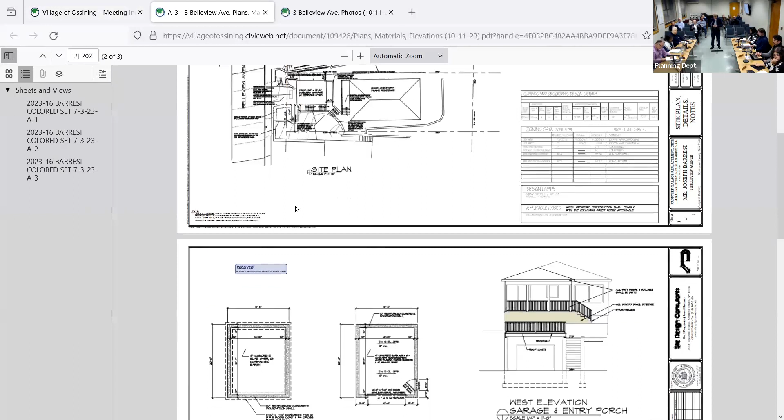We were brought on board at the beginning of this year to try and resolve all of the issues, to clear up the violations, to knock down that garage because it is in pretty bad shape. I'm sure Mr. Gastinelli has been by that site a few times, you can see it. So we want to knock down the existing garage and put a new garage in its place, just a little bit larger footprint. Again, we want to clean up the site.

We want to put new concrete stairs to access the front of the existing home. And then there are other violations that need to be cleared up, which will be included in the final plans. The existing front porch has some structural work that was completed without a permit. There are stairs with no rails, so we'll address those separately. But it'll all be part of the same submission to the building department, hopefully after we're granted the variances that were requested.

Do you want me to list the variances, or just read off of your paperwork back to us? How does that work?

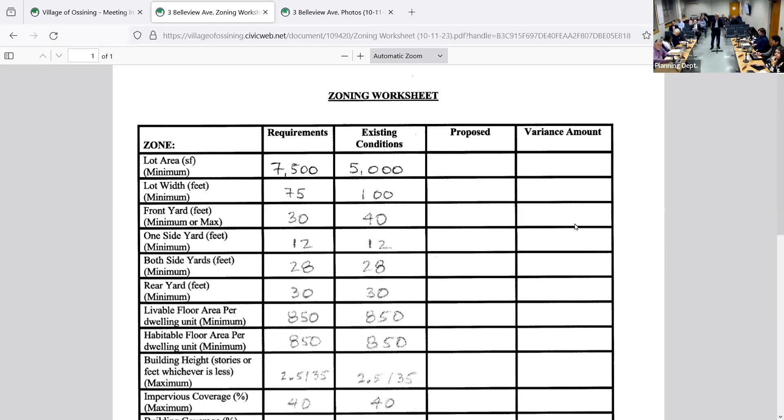Why don't you go through the sheet if you could? So what happened was Mr. Gastinelli provided that sheet. We received an email back on November 8th that we were not going to be able to appear before this board, and that we had to clear up and provide a new zoning data chart, which we did. So we provided a new existing site plan, proposed site plan, and then a new zoning data chart. So that's not it.

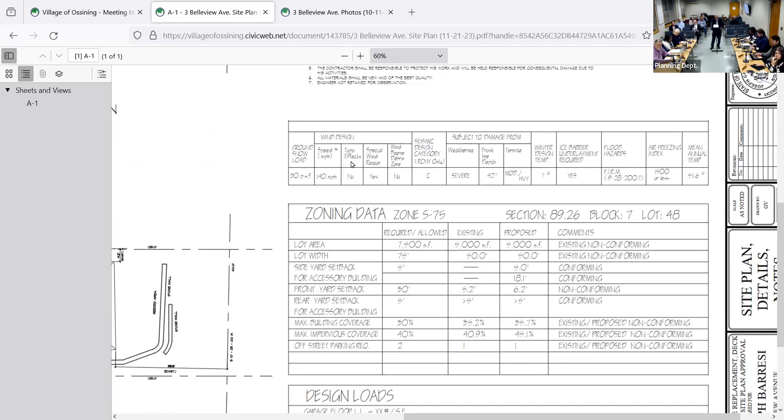Okay, is this it? That is it, correct. And if I could pull my sheet out. Hold on. Hey, give me a minute. Okay.

Thank you. So again, if you take a look at the zoning data sheet, it is an existing non-conforming lot. Code requires 7,500 square feet. Mr. Barresi's lot is 5,000 square feet. I also want to note that if you look at your zoning map, his parcel is the last one in that zone, just one up from the corner, and his is the smallest parcel in that particular zone. So we're also working with a non-conforming lot. The lot width is only 50 feet, where 75 is required by code.

And then I'm a little confused, I thought I read in your code that the setback for an accessory structure is 5 feet off of any property line. Yet it's not supposed to be in the front yard, the side yard is okay, so it's the front yard. So the existing garage is actually 5.2 feet off the front property line. We're proposing to move it back a foot because it helps us with our retaining walls and the grading of the property, so we're proposing to put it at 6.2. Again, because we're an undersized lot, we really don't have much leeway on working with that setback.

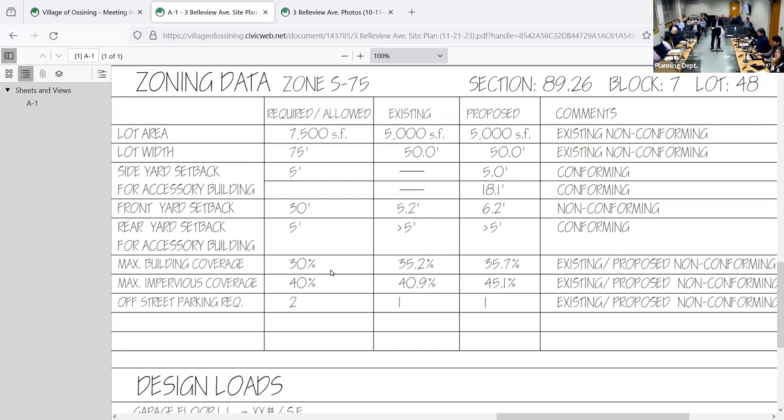Again, the building coverage: the code allows 30% coverage. The existing is at 35.2, and we're requesting to increase that to 35.7. Again, it's basically by changing the footprint of the garage. The existing garage is 319 square feet; we're proposing 330. I looked at the survey, and if you look at the garage on the original survey, it's kind of a trapezoid rather than a rectangle. So we'd like to square that off, put a garage in that's 20 feet deep by 16.5 feet wide.

So that's a question - you said 35.2 is what it is, and it's going to 35.7, okay? So I'm just wondering, am I looking at the wrong zoning data sheet? This says 43.3. Right, so this is the corrected one. That was the email we received on November 8th, because what happened was, I guess Mr...

Barresi had previously filled out the application, perhaps last year or the year before, and submitted that entire packet. We didn't get a chance to review it at the time. So when we reviewed it, we went back and did the calculations. These are the corrected calculations.

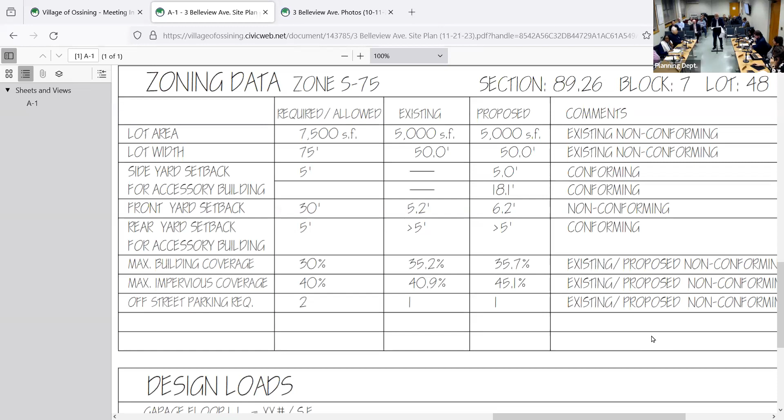So, the picture we just saw before of the garage - is this new garage going to be exactly in the same footprint, and the same driveway? It's going to be about 11 feet larger square footage wise, and we were hoping to widen the driveway a little bit, again because we have an issue with parking.

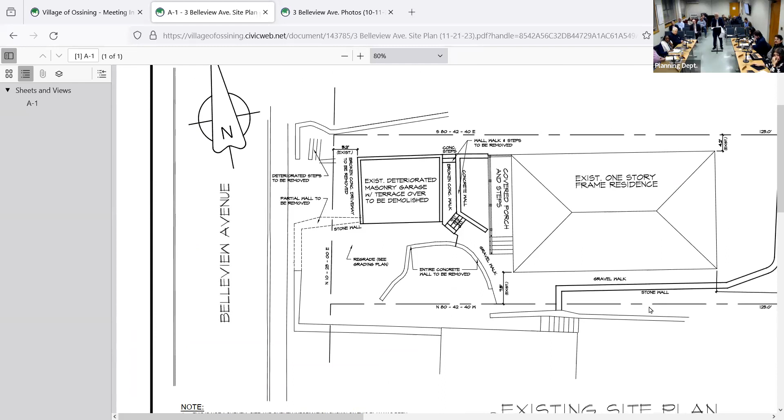We're required by code to have 2 off-street spaces. If you take a look at the property line, there's only 6.2 feet from the property line to the front of the garage, and we can't push it any further back to the house. So it'll be a 2-car garage - not really, it'll be 1 car and a half.

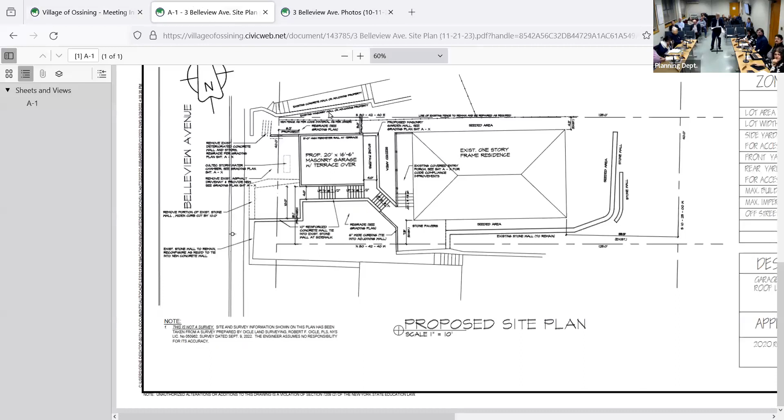I think there's a plan that shows the existing layout and where they're proposing. That's the November 21st proposal - I was looking at the wrong one. If you look above it on that same sheet, that's the existing.

So you're asking for a variance on parking then? Yeah, I guess we need it - but it's an existing 1 car now, so we'd like to continue that, is what we're requesting. You're not asking for less parking than you already have? No, we're not asking for less, we're asking to maintain the same and just make the garage a bit wider, that's all, to allow for storage.

Again, if you walk the site, you'll see that there's a difference in elevation, probably close to 15 feet between the elevation at the street and the elevation at the front of the house. If you take a look at...

Another question - the max impervious surface coverage, is that not increasing that much? It's only going to 45.1 over our 40% requirement.

But are you open to using a pervious surface for the widened driveway? Sure, it's one way to get it back down, absolutely. I wonder what percentage that changes it, because that might help. So if we use, for example, Unilock on stone dust, is that considered pervious? Yeah, that would be considered pervious. Okay, so that's something that would reduce the amount of variance needed - we'll just make a note of it.

So let me just clarify - you're asking for a variance on the 5,000 square foot lot. It's for the entire existing lot, which is non-conforming. So I'm guessing, do we need a variance for that?

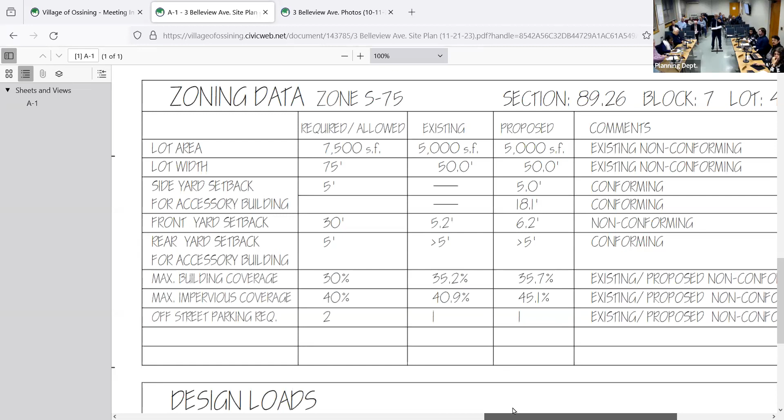We tried to push it back a little bit further, but we're afraid once we start digging there - we have a retaining wall, it's a pretty massive wall to hold back the building, which is again 15 or 20 feet higher than street elevation. So I think we have the back of the garage as far back as we can go. Unfortunately for Ossining, there's a lot of lots that are very skinny, so you're forced into non-conforming situations, and the garage is pre-existing.

And the reason you have to come before us for that is because once you demolish an accessory structure, it's considered a different use, so you have to find relief. I understand, and it all makes sense.

It looks like, while you're still asking for a variance for front yard setback, you're moving closer to code - we moved it back as much as we were able to. That seems positive, and it obviously looks like it's going to address a safety issue, and the stairs are obviously a safety issue as well. And then if you did walk...

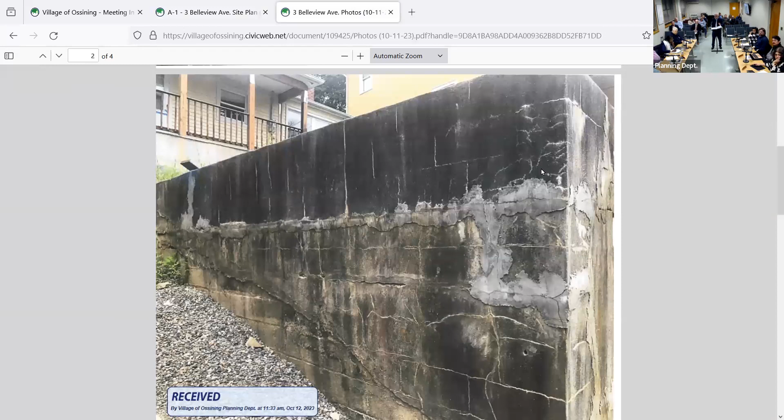If you walk the site, you'll see there's a lot of rubble, but that's all going to be cleaned up. We're proposing seeding on the right side and the rear of the property, with just a little bit of paved area on the right side, using Unilock there as well.

Is the nature of the structure a single family or a two family? It's a single family, yes, and it's going to stay a single family, absolutely.

Question: how much more space would you need for it to be a two-car garage? Would that fit there? Too much, yeah. I'm just wondering, because I know you're making it bigger, but you're not making it big enough. You also have to consider if you do a two-car garage, you'd have to do a curb cut, and it's a parking lot issue.

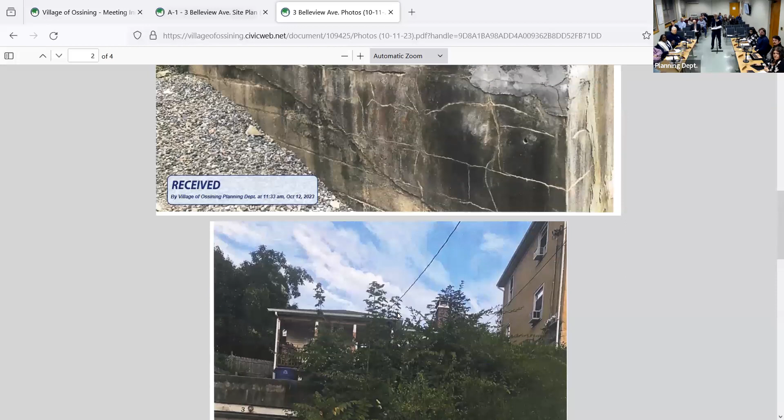If you walk the site, you'll see there's an awful lot of earth that has to be removed, and we have to do grading. We're trying to minimize the amount of retaining walls we have. The southern wall of the stairs will now become the retaining wall, and once we regrade, we're hoping we won't have to put any more retaining walls on the south side of the property.

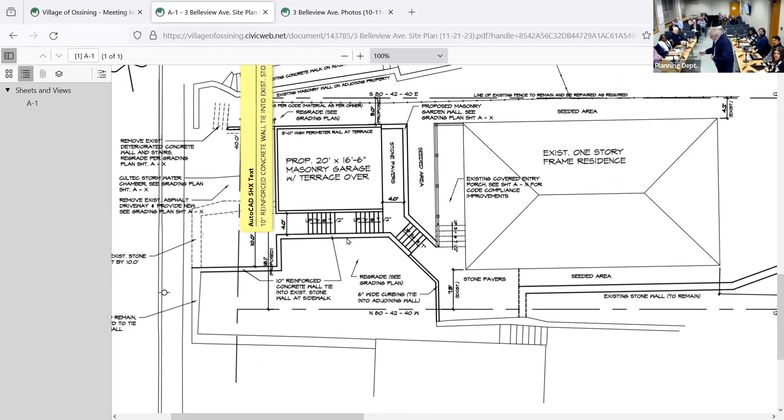Just for the benefit of the board, the retaining wall - since the existing retaining wall crosses over the property line, that's the part that's remaining, and that's what you're tying into, yes. So the retaining wall work is all on Mr. Barresi's property. Yes, where the stairs are, this bottom wall will then become the retaining wall, and we're going to try to gradually slope that grade so it won't really be noticed.

Anything else, I'm more than happy to try to answer. Okay, just to make sure the variance requests are the correct variances.

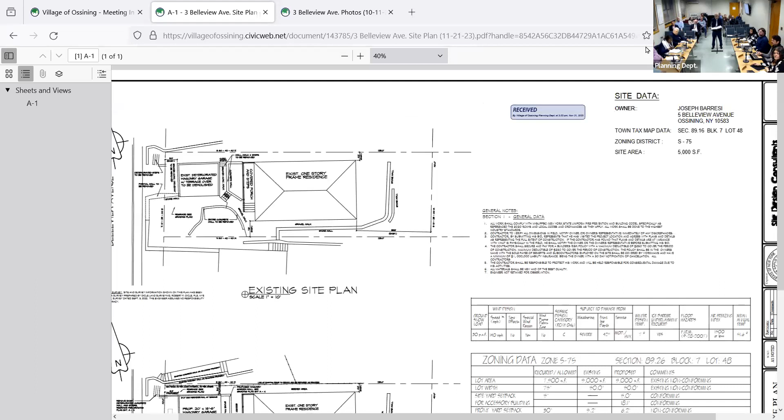So we know it's one parking space, front yard setback, building coverage, and impervious coverage.

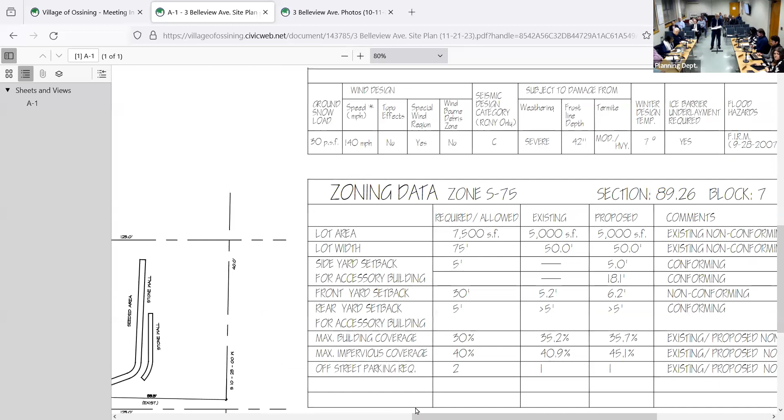I'll try to get that number down, though I don't know if I can get it to 40%. I'll have to do the calculation. Were we going to say we're allowed to conditionally approve that based on them getting new numbers and switching it out? That's what I was just talking to John about. I think we could give a condition that includes it, right?

Can we say if they replace it with pervious material? We wouldn't know what figure to use in the resolution though. If we approve the variance, we'd have to know what figures you as the board are approving, because in the past we've said 'no greater than' in a prior resolution, so I was wondering if this would be different. We could use that same language.

So right now the impervious coverage is 40.9, and you're asking for 45.1 - that's 5.1 over. I'm not opposed to just saying we would approve the 5.1 with the thought that they will look to decrease that number if possible. Yeah, that'd be great.

You have a request for the building coverage as well. So the building coverage right now, the required is 30%, the existing is 35.2, and you're requesting 35.7, because we're just increasing the footprint of the garage by 11 square feet. So we're asking for a 5.7% variance.

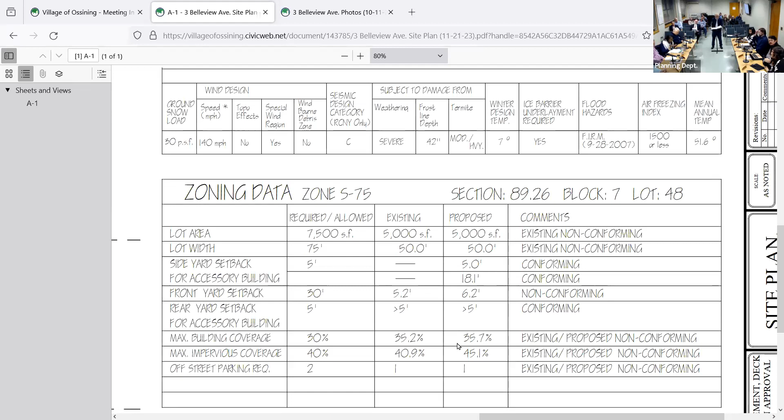No, that's why I was asking if it's in your combined side yard setback, exceeding maximum building coverage and combined side yard setback. That's an error, the combined, if they noticed it, they probably wouldn't need it. So we took a copy of the ordinance, you can approve, I guess, any of the variances you want that apply to this application.

Actually, the retaining wall on the staircase, that's changing, that's actually closer to the property line. So now I'm thinking that because that is part of the house, what you're coming up with is the combined yard includes the setback from the staircase. Yes, that's the 18 feet we're looking at. That's correct.

Any other questions from the board? That was confusing, wasn't it? It's confusing to get here.

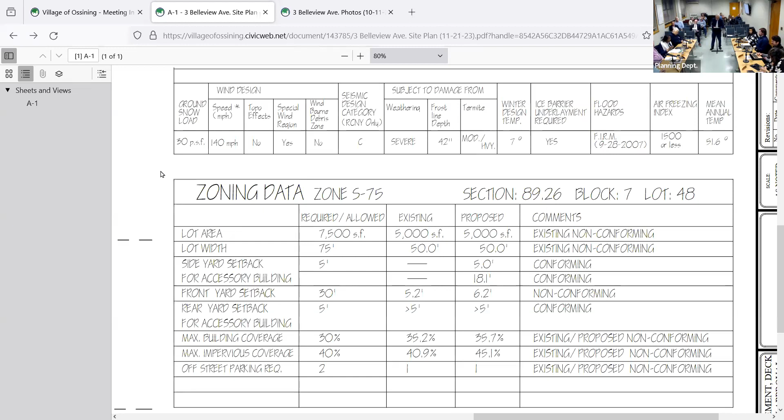If there's nothing else from the board, may I have a motion to open the public hearing. So move, Bob. Second, oh, Kyle. If there's no objection, the public hearing is now open.

Is there anyone in the audience to speak on this project? Just raise your hand. Yeah, coming up. Just trying to be polite. We're not playing here, we can smile. Well, walk away. Would you like me to sign in? Yes, please, I'll be quick. You can do it after you.

No problem. I happen to be Joe Parisi's next door neighbor, so my house really isn't in the picture, but it's one over to the left. Can you give your name and address? Joe Lynch, 1 Belleview Avenue. Thank you.

Joe's been a wonderful neighbor, a wonderful person to have in the neighborhood, a wonderful part of the community. As you may know, Joe is both a peace officer and, like our police chief, a Marine Corps veteran. He looks after us, he's a great guy to have around. He also owns the property which is one up from him, or perhaps he owns it with the bank. But if you drive past the property, you'll see how well kept and maintained it is. I just wanted to speak, not about the project itself, I offered no objections, but I wanted to speak for Joe as to how responsible he is in the neighborhood and how he's carried through on a project which I think is important for us.

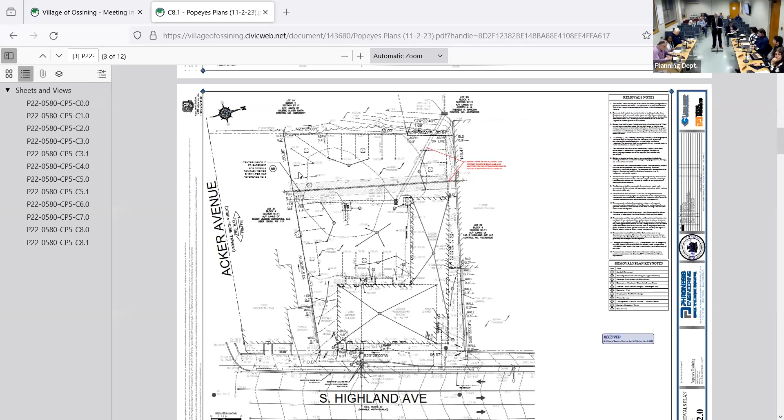By way of background, Popeyes is located at 144 South Highland in the general business district. The property is small, 0.36 acres. As we develop it, it's going to feel much more open than it exists right now. The proposed Popeyes is going to be just 1 story. The existing building there is 11,500 square feet, while the proposed building is only 1,990.5 square feet. So it's going to be a much smaller building, hopefully much better for the community.

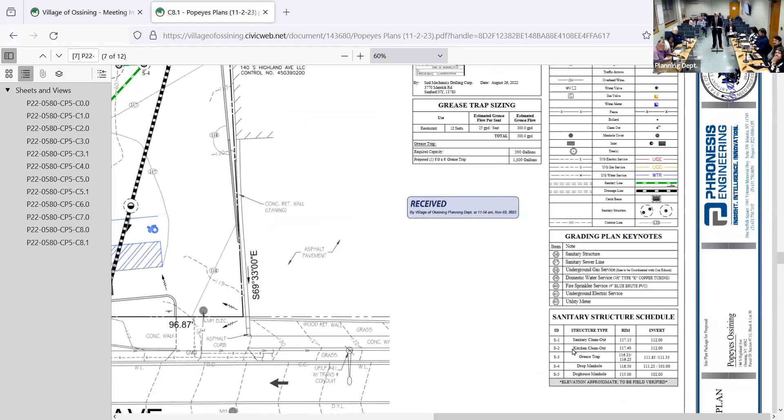Regarding the northern driveway, which requires the 2-foot setback, this ingress and egress is just non-conforming. It's existing there right now; we don't propose to change anything. We would need an area variance setback of a mere 1.4 feet. As my engineer, Anthony Stankinelli of Phronesis Engineering, will testify to this board, we are not aware of there being any safety issues. No safety issues were ever presented to us, and there will not be any safety issues by continuing to do this. So regarding that driveway, we just need the 1.4 feet. It exists; we're not looking to change anything, just to continue it.

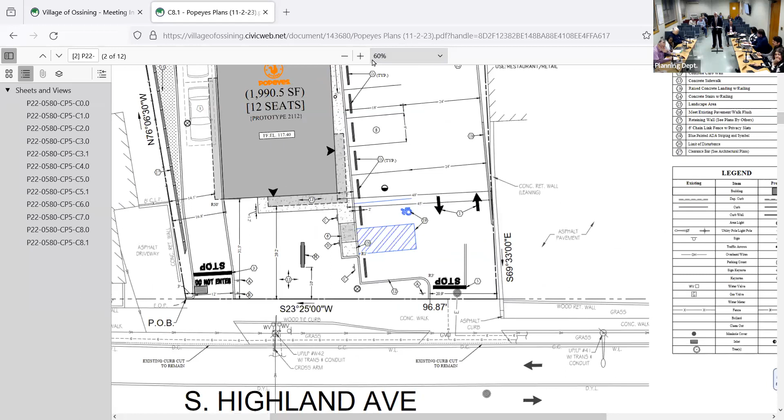So let's get on to the bigger items with the signs. Unlike the prior application, this is just for signs, so it's not going to have any impact on the community. Most of the signs are actually painted. There are 4 variances that we're seeking. One is that only 2 facades are permitted. In this day and age, with the development of retail, you have to put it on all sides. Well, you don't have to, we're asking for it, because that's what the retailers need.

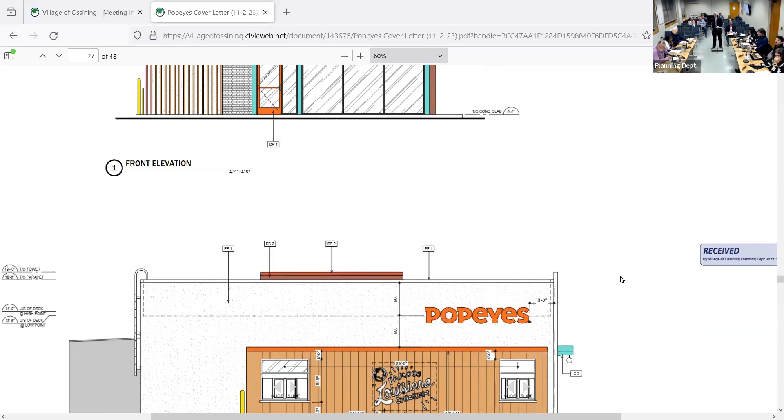There's going to be one facade facing Highland Avenue. The second facade is the drive-through window, which is going to have a painted sign on it as you're driving through and picking up at the counter. And the third side that we're seeking is for when a person pulls into the Popeyes, parks their car, and walks in to either place an order or pick up an order previously placed — that will be painted too. So that's why we're asking this board to reflect, this is what Popeyes is developing all throughout the country, and this is what the retailers, the fast food chains, want.

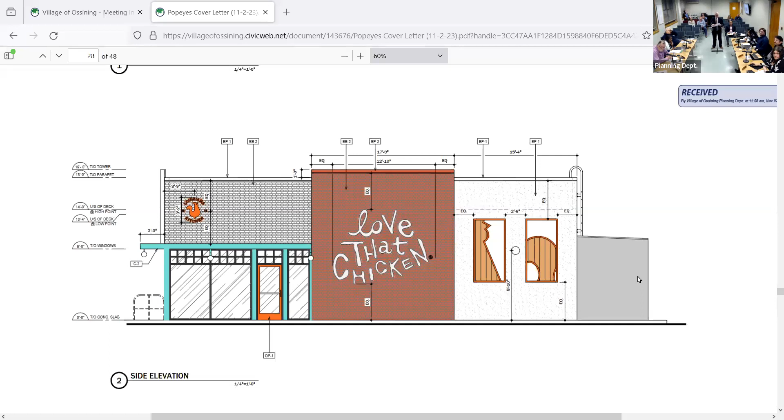As this board might know, the whole game has changed. People call in advance, and then they're either coming to the window to pick it up, or they're parking their car to get their items. It's not where people are necessarily going to these restaurants to sit there with their kids — it's in and out. So as set forth on the elevations, the principal facade, which is facing South Highland Avenue — that's the one — the code permits 71.75 square feet, and we're asking to get it to 74.01 square feet, so on that principal facade we're seeking a small variance of 2.26 square feet.

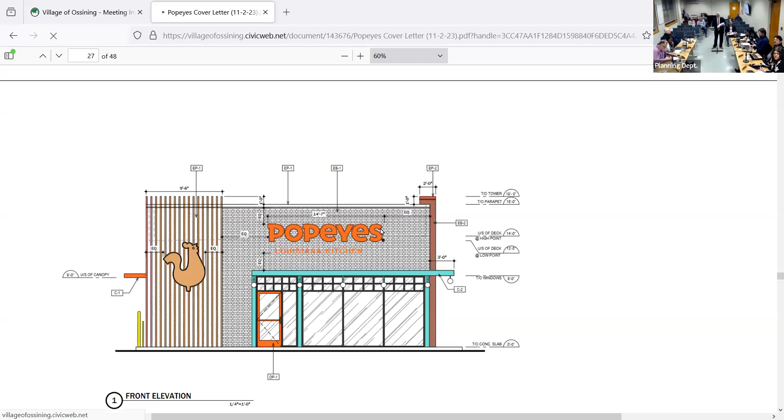On the second facade, which is the drive-through, the code permits 35.87 square feet, and we're asking for 74.63 square feet, which is an area variance of 38.755 square feet.

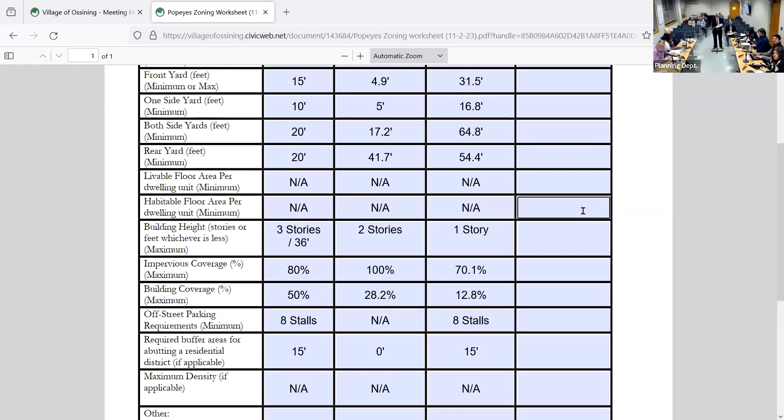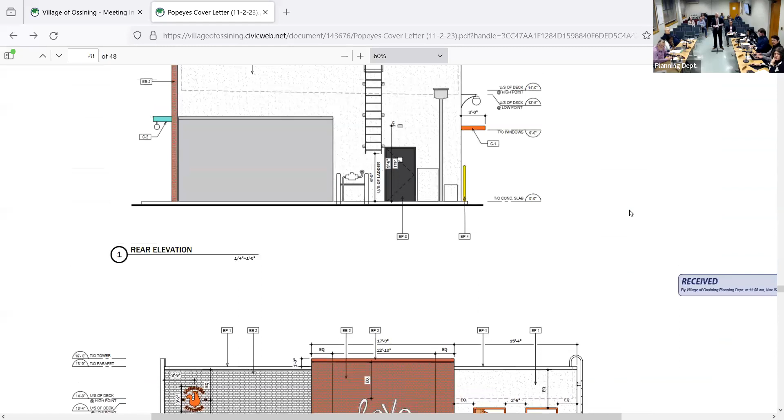So that's on the second one. Then on the third, you'll notice on that second facade, where it says famous Louisiana chicken, where it says paint, that's painted on. So it's not going to be jutting out or whatever, it's painted on.

Love chicken is 113.14 square feet out of the entirety of the 123.16 square feet. Now, this board had an application that was recently before it, Hair Coffee.

In the Hair Coffee application, when you add up all of those variances for the three sides, it adds up to approximately 126 feet. In Hair Coffee, which was granted by this board, the variance that this board gave them was 166.28 square feet. So we're asking 40 square feet less than what this board previously granted Hair Coffee.

And a key aspect in the Hair Coffee, and it's part of our submission and I attached it to this board, is that a lot of the Hair Coffee was painted, just as here on those walls. So when you go through the balancing test, it's set forth in my letter, I'll go through it and then you can make your own determination.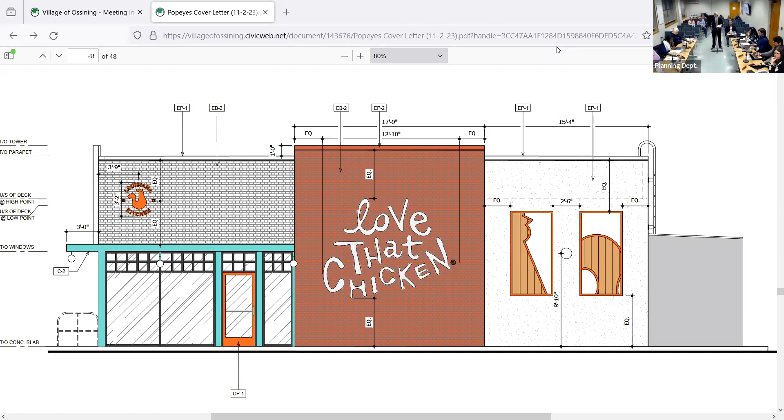The requested areas are not substantial, because there's no impacts, we believe, on the community. So, if you just look at the size, and you look at 1.4 versus 2, you could do a percentage, but the case law that I presented, and as your counsel can explain to you, and as she explained on the first application, the real issue is, as a result of these variances, is it going to hurt the community? And we don't think so.

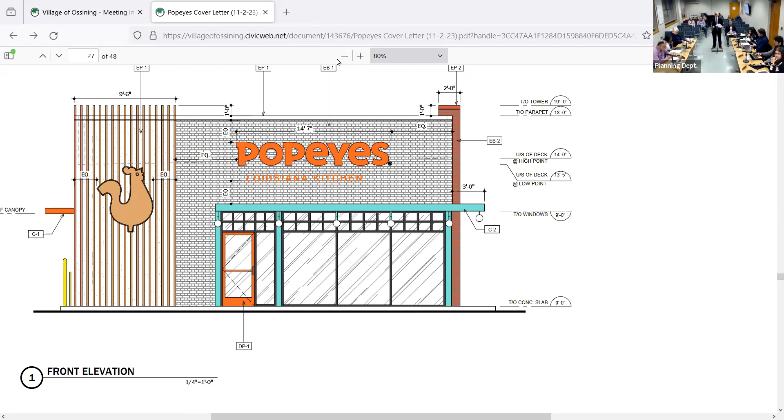The proposed variances will not have an adverse effect or impact on the physical or environmental conditions. It's not going to have any impact. The 1.4 feet that we're seeking on the driveway, the driveway isn't moving, so we're not changing anything. And the fact that there are going to be signs is not going to have any environmental impact.

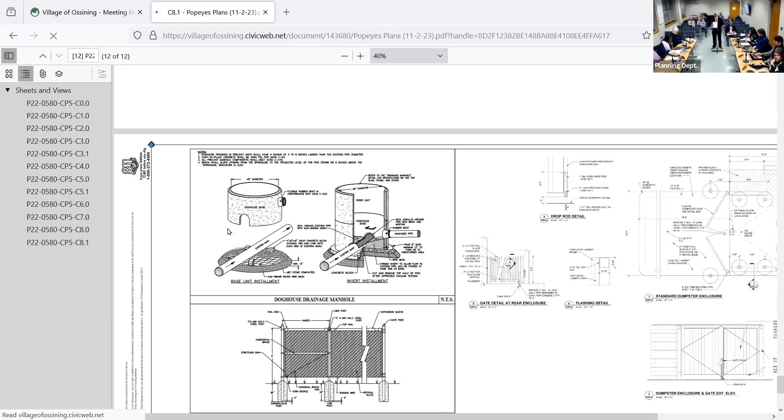And the proposed variances are not self-created. As to the 1.4 feet on the driveway, that's no change, so we're just looking to keep it as it is. And regarding the signs, you can't have a fast food place without signs. I think it goes hand in glove.

For me, nothing here is an issue except for the three sides, because there's at least two or three of the five factors that you wouldn't meet, in my opinion, for that specific variance. That's the only thing I have up for discussion on my end. So if the engineer can change anybody's mind about the other ones, it'd be worth it, but if you don't have questions, it seems like extra time spent.

Mr. Davis, would you mind clarifying for me real quick? Is the signage in this application mandated by Popeyes as part of your franchise agreement, or do you have any leeway or flexibility with how and what you want to sign?

Just for clarification, I'm Stankinelli from Assist Engineering, 1601 Veterans Memorial Highway, Hauppauge, New York. These are Popeye's standard signs. They're very specific with their signage. They have over 3,000 locations across the country. Majority of the stores all have these signs, but not all. I can't say for sure of all. I didn't personally design all of them, but this is their standard signage package that they push on their franchises.

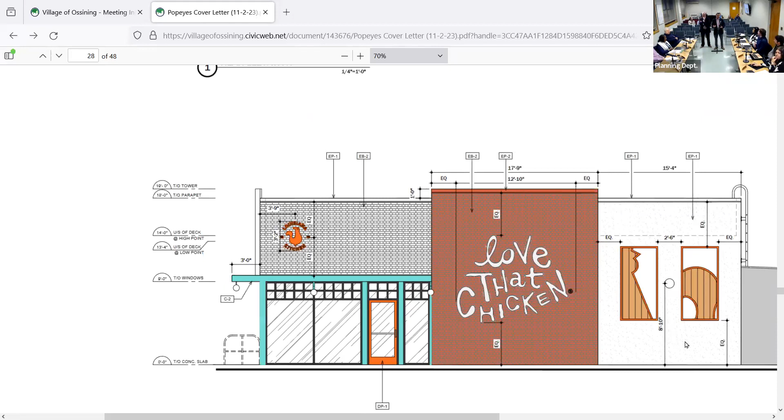I've got a much more pressing question than that. It's huge, because the hair copy thing, I was here for that decision, I think everyone in this room was here for that. And it's a different district, the traffic issues are different, the visibility is different. It's a non-franchise, single owner operated location versus a completely different situation. So there's no relation there for me, and it's only on one side.

My question is much more basic than that. I'm less concerned about the signage size than I am about the adjacent uses.

So I noticed that we have not gone through who is to the north, who is to the south, who is against that property on Revolutionary Road. So are they all homes there, or businesses, what's there? We could skip that, that's not in our purview.

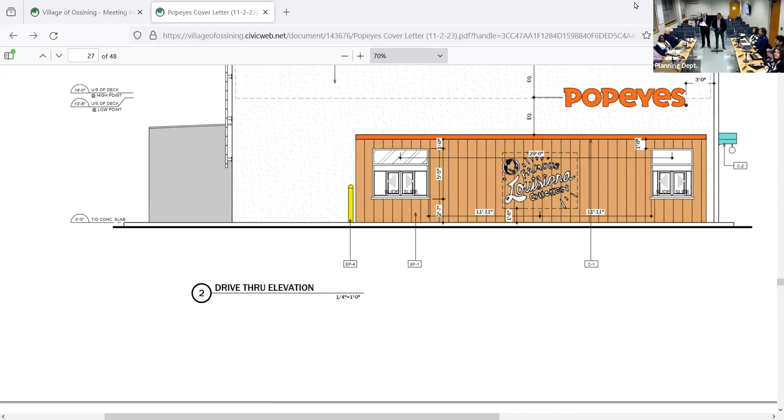Well, one of the factors is the potential impacts on the surrounding neighborhood, so you can consider impacts to neighboring properties. It's a business replacing a business, but it's the impact of the signage on adjacent properties, the aesthetic impacts, the overall character of the neighborhood.

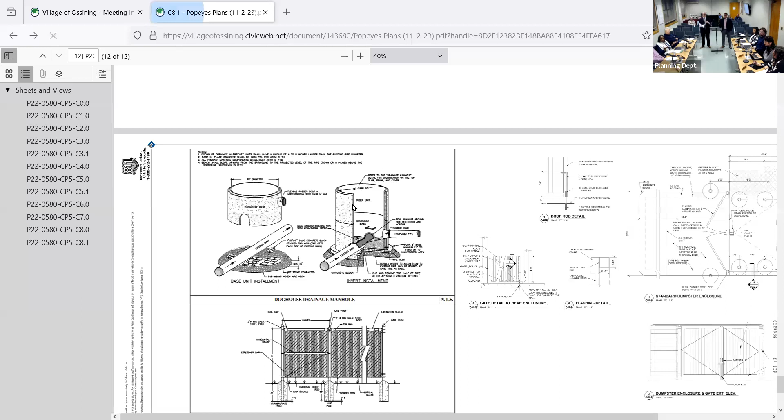Right, but on both sides of that are two different businesses, so. Well, I don't know that. Mr. Stankinelli will know, I know there's a lot of that on both sides. Let's let the applicant make their case, he'll address everybody on this side. I just wanted to point out in the hair copy application.

Madam Chairwoman, regarding the issue about the 166.28 square feet variance that they needed: you had stated a facade sign that hangs out, but it's actually drawn, like a mural drawn right on the wall. So yes, it's a 166.28 square foot variance, but it's right on the building itself. That's what we based it on, but you're leaving out the importance of the first part, so let's use the whole thing.

The first part was about the artistic capacity of it being a unique design. If you read the entire conversation, I had a lot to say about it, which is very different than predetermined Popeyes marketing franchise stuff that's the same for everybody, minus small variations. So it's not that the signage isn't valid, but using that argument against one of our past decisions doesn't hold any weight.

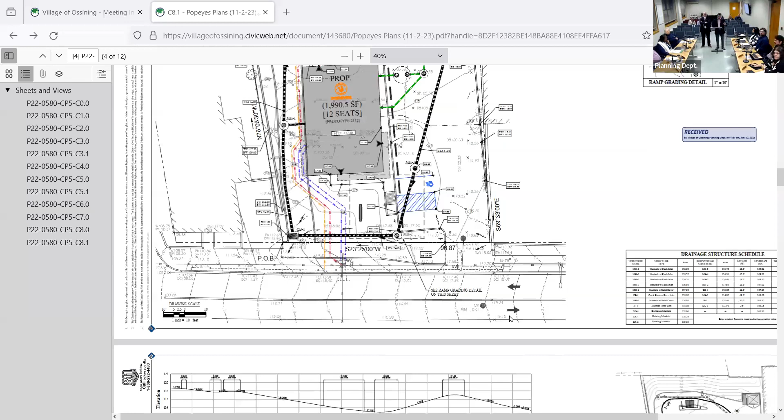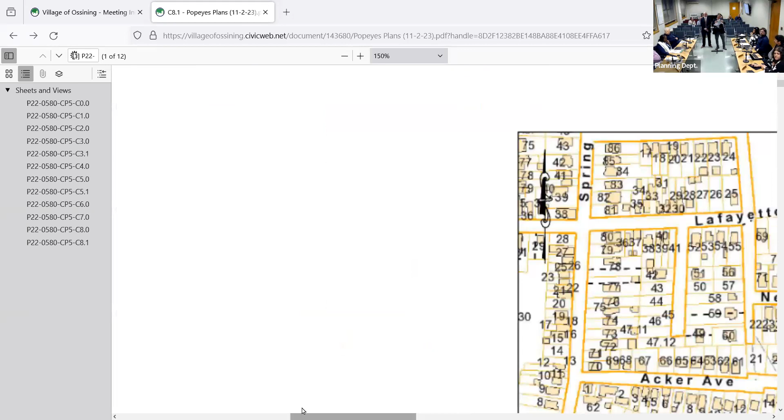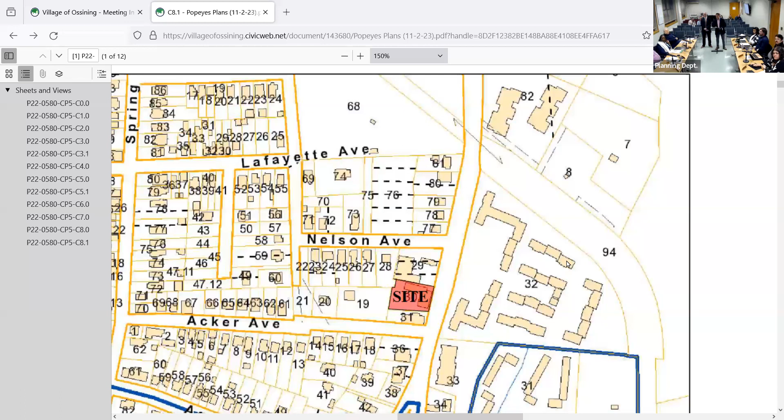Let me answer that, because we designed this to greatly improve the site from the existing conditions. There's commercial on each side of us, a busy street in front, residential behind us. The existing parking lot had parking right up to the front. We are now holding over 34 feet of buffer to the residents with evergreens and plantings, so it's going to be a great improvement to the neighbors. We were very cognizant about that, and that was one of our main goals when designing the site.

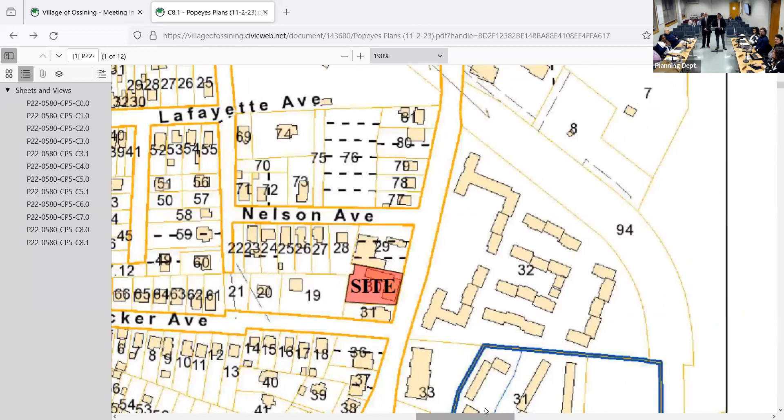The only other thing is I've been in that building many times because of the jeweler's there I go to. That site actually goes down substantially, like 6 or 7 feet. So when we're on South Highland Avenue, are we going to be looking at the roof? Popeyes is set 40 feet back from the street, and there are two positive things about that.

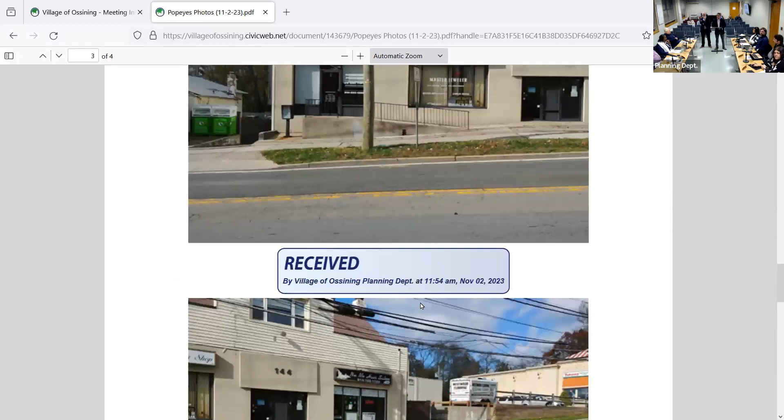When we designed this site, we purposely pushed the building back over 34 feet. This way we could keep enough landscaping and area for the road to grade, so we could keep the building elevated at an average grade. It's not going down—well, it's actually going down a little bit to capture the runoff and then back up.

The reason I'm bringing this up is that as much as I'd like to see Bob get his chicken, I don't want to be looking at smokestacks or chicken smoke coming out on South Highland Avenue. By the way, the elevation of the building application is 117.4. If you look at the grade in the street directly in the middle of the building, it's 115, so we're actually 2 feet higher.

Just so the board knows, this is currently also before the planning board, so they're considering traffic and all of that. We're really just looking at the driveway and the signage. So the planning board was comfortable enough with their plan to refer it to you to consider the signage and driveway. Issues like traffic are not within your purview—that's being specifically considered by the planning board right now.

I just want to clarify, I have no problem with Popeyes—we have a Domino's on that street, a McDonald's, a Taco Bell going in, a 7-Eleven. It's no secret that whole stretch is franchise and commercialized. But you do have a reasonable alternative, and I think it would be unfortunate for you to have us vote tonight and get a negative declaration, which would be tough to appeal if it's made based on objective decisions versus just modifying it to be within the current code.

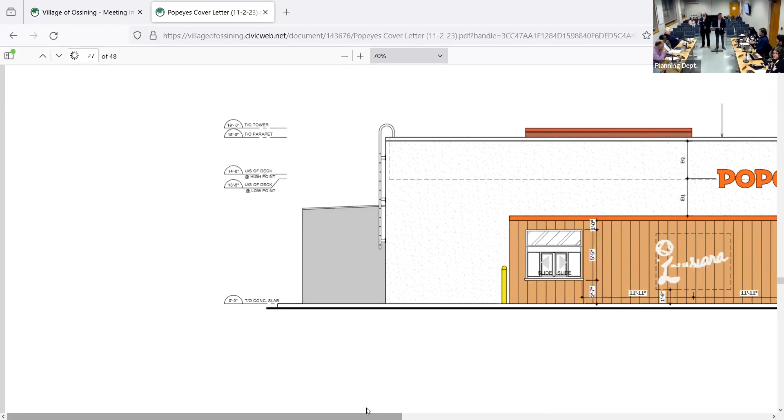Personally, I have a problem with that argument not being relevant because it doesn't fit within the purview. So what is relevant is the size. That's the side. And other Popeyes, although this is branding for most of their buildings that are standalone structures, they do have some where Love That Chicken is smaller in a different location.

That would solve your issue and you wouldn't need a variance. One of the things I would say is the reason why the code allows for two sides, especially on corner properties, is if you're trying to get the public to see the business from two streets. But in this case, at least one of those sides is not really facing a public street, it's facing the parking lot, which actually would be visible if you were heading westbound on South Highland.

That coming side, right, coming down there. That's traffic. If you're saying the building is set back somewhat, I don't know what the visibility is. You'll eventually see it, it's angles, right? When you're passing, you're gonna see that sign, and that's the whole purpose.

If they put that sign on the building, it's set back, the sign's not on the building, right? It's actually on the building, painted on. Which is what I'm saying, because you see that's the side that's facing - it's not even in the first third, say, of the building facade, it's in the middle and towards the back.

Right, Love That Chicken is gonna be seen by the people in the parking lot. The corner sign, which is an actual sign, is under the threshold and visible to the road.

So I guess the question would be, do we want the sign that's more visible to the road versus the sign that's visible to the parking lot? You already have that. The feasible alternative by code is that you just don't have it there.

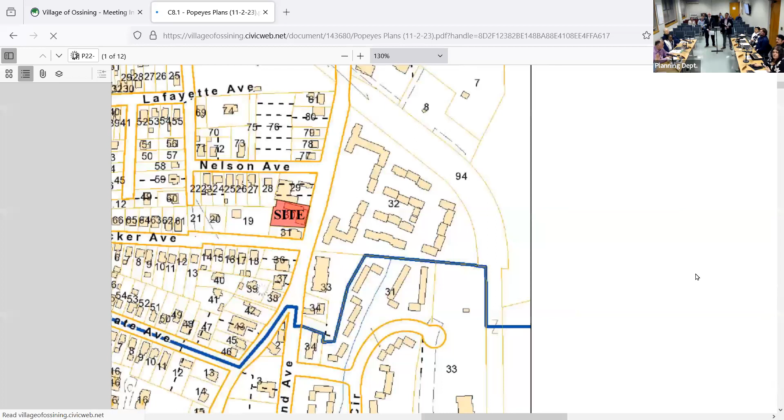Well, my question would be where is the access side, where's the facing corner, the parking lot, the Tabasco side that's being removed - you're really putting the signage in the front, the side, and to the right.

But we're getting into minutia over this case. This is not the first time someone has used precedent like that. I think the issue is, only in this case, because it is visible north and south on South Highland Avenue and in the front.

Whereas Taco Bell is more like you're passing through, Domino's is too, but this is kind of that one property that jets out just a little bit on both sides. Tabasco's on the corner, so that's big enough to see. The laundromat is on the corner, so it has two sides, but normally businesses doing that put a freestanding sign that faces both sides.

And that's how you see it. That's what happened with the view, and we voted it down, but because the property line was further back and it was actually controlled by New York State DOT, it overruled our decision.

So in the past for signage, we've been very strict for that reason, because as soon as you open the floodgates, everyone just - and it's already happened on some other. So they could have a two-sided pole sign if they want.

Yeah, because you're allowed to have a freestanding sign, right? But that's what I'm saying, there's feasible alternatives. I've seen that sign in several locations, the pole, and that's what I assumed was going to happen here - the pole with the big sign.

And if the concern is to be able to see it when you're coming north or south on Highland Avenue, a freestanding sign means you don't need a variance at all, as long as you go by the signs. So then the question is, would you look at a freestanding sign that you could see on both sides in the front? Even if you had one side of the building...

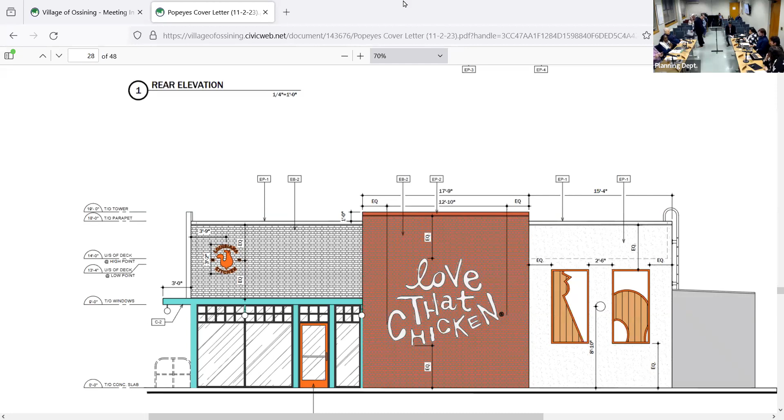Is there anyone in the audience that would like to speak on this, sorry, no objection, Olga seconded, Mike. There you go. Okay, if there's no objection, the public hearing is now open. Is there anyone in the audience to speak on this project? Is there anyone on Zoom to speak on this project?

Since there is no one in the audience or on Zoom to speak on this project, I think we have to adjourn the public hearing. Yes, motion to adjourn the public hearing, but I believe we can talk about the parking. So I'd like a motion to adjourn, no, I'd like a motion to just discuss the parking portion of this, the driveway.

The driveway portion, or the area, that driveway setback, the setback for the driveway only at this time. But you still need to adjourn the public hearing. The public hearing is still open, we haven't voted. Yeah, that's okay, I'd like to motion to adjourn the public hearing till next month. Your name, Bob. So moved, Kyle, or second, Kyle. If there's no objection, the public hearing is now adjourned until we get further information.

Now may I have a motion, are we just doing the 5 factors for the driveway, the setback? Before we get to that though, has this property been posted, signage? Everything's been noticed, yeah, we know this, okay, oh absolutely.

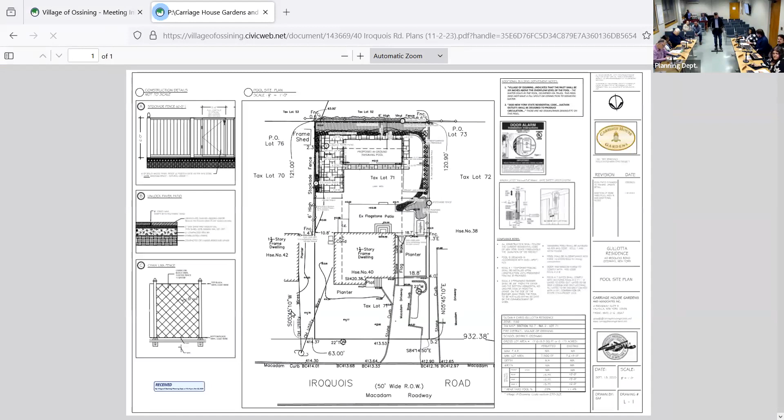It's a particularly small residential lot. It is in zone S50. The square footage on this lot is less than 0.2 acres, I believe it's 0.17 acres, 7,618 square feet for the entire property. The front yard is about 63 feet wide, and the side yards are each about 121 feet, rectangle here.

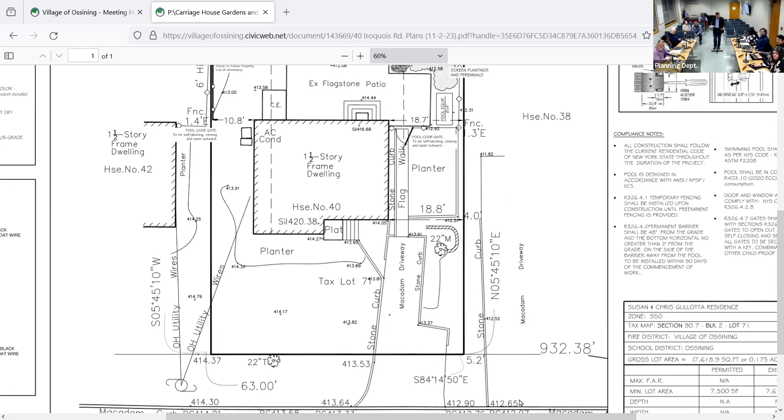Design wise, the pool is in the rear yard. We're meeting the side yard setback on each side of the rear yard. Design wise, we went through a few different iterations because of the size of the property to get us to the point we're at today.

So a typical rectangular swimming pool is 20 by 40. We have this pool at 32 by 14. Another element we like to do around the pool is a walkway about 4 or 5 feet wide, to squeeze this pool into the rear yard with a little bit of lawn space between that and the rear patio. We reduced that walkway around the pool to 30 inches, just so they have somewhere to walk around the edge of the pool and not walk in the lawn.

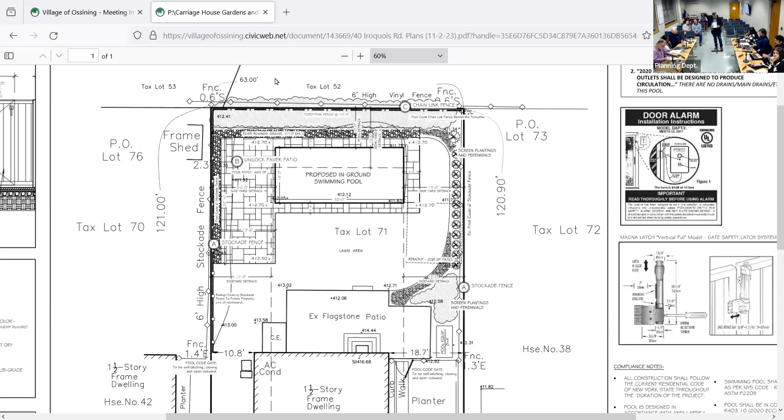That's really all I have. I do have some other photos of the rear yard that may or may not be in the set that you guys have. The Gullottas also went around and spoke with their neighbors, and we received quite a few letters, about 12, from the neighbors, even though they might not be here this evening.

So we generally only go by what's submitted prior to the meeting. I'd like to hold them up and say we got them. Sorry, I was just admiring the dog here, that's everyone's favorite.

Can I ask one question? What's the distance, it's not shown on your plan, from the patio to where the pool's going to be? How much lawn space? Great question. From the rear step of the existing flagstone patio to the pool is 20 feet. So that lawn area you would have is 20 feet, from where those neighbors are.

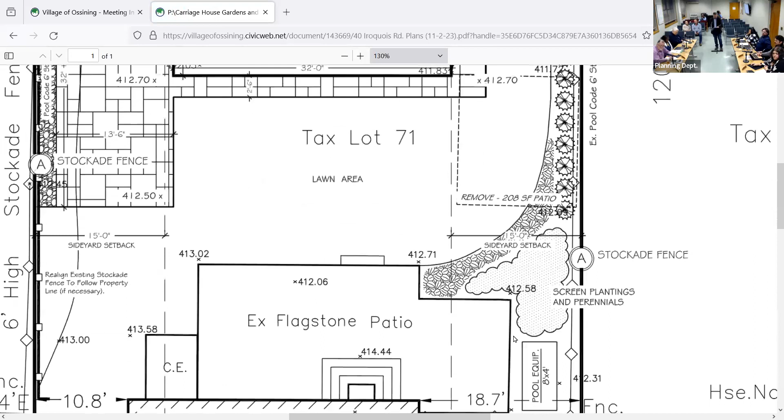We're proposing it to be 20 feet, to the edge of the walkway. So yeah, it's about 20 feet from the back of the patio to the pool. That's the amount of lawn space we have between the back of the flagstone patio and the pool.

We've seen above ground pools, in-ground pools, safety issues, all of that. Most of them require a variance because the property is restricted, but in this case, why not just move the pool 5 feet closer to the house and not require a variance at all?

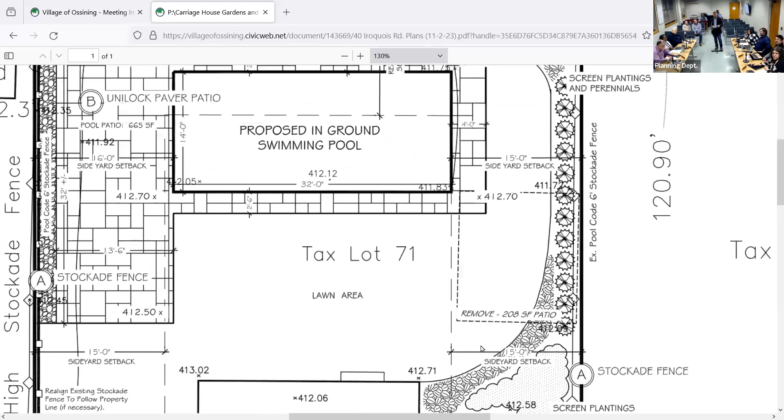Well, first of all, the pool's a lot smaller, so we've already reduced that 5 feet by cutting it off the pool. The design reason is to have this reasonable little rear yard space of lawn in the backyard.

One of the questions we have to answer is whether the benefit sought by the applicant can be achieved by feasible methods other than the area variance, because granting variances is only when required. So if you're not on one of those properties where the pool is up against the property line and you literally have nowhere to go, that's a different story.

In this case, while we can empathize with the fact that you've already shrunk it to meet the side yards, if you move it 5 feet into the yard, you don't need a variance.

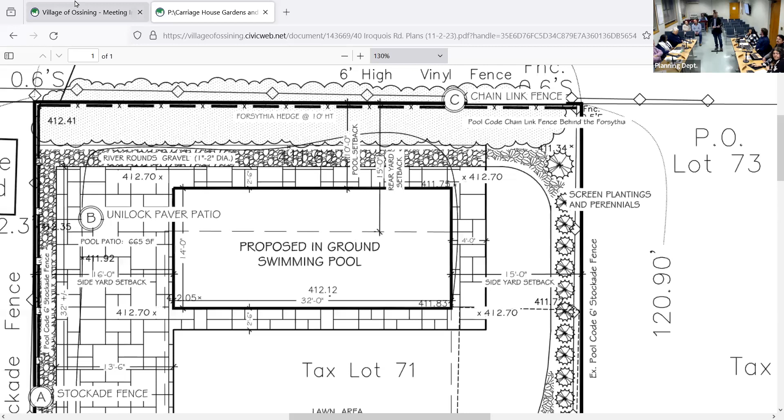Correct, but that continues to shrink it down. In other words, if we were to do that, it would be 13 feet between the back step and the edge of the patio, or 15 feet between the back of the patio and the pool. That would mean no variance.

And it's for two reasons, not because I'm trying to be a hard ass, but when you look at all the pools that are in-ground, not the above ground ones, in that neighborhood, none of them are within 5 feet.

So even if the neighbors are like, hey, this is good, the variance lives with the property, not the owners. The owners could be the best people in the world, but whoever inherits or buys that property in the future now owns that variance with it. So if there's not a reason for the variance because there's a feasible alternative, legally, I have to vote no.

I just also want to remind the board that it is a balancing test. You have to weigh the benefit to the applicant against the health, safety, and welfare of the neighborhood at large. So a finding of one of the factors is not dispositive of the entire action. It's the totality of the circumstances.

To give you examples, an undesirable change or detriment to nearby properties can be setting a precedent that alters the character of the neighborhood for future variance requests. That would be a no for me, or something in the negative.

Which one was that? Was that the first question? Yes. So this proposed request for a variance, you're saying, would cause an undesirable change in the character of the neighborhood?

So it's not that the pool is an issue, it's that you are setting a precedent for everyone in that jurisdiction to use, just like they tried to use with us in the last one. Where, oh well, now they've done it, the next person that requests it will say, you have to do this because they set the precedent.

Which is more than the minimum requirement of that district, right? It's not like you have an undersized lot that causes the problem. You have a proper sized lot in that district.

The cover letter also cites topography as one of the challenges. But I didn't see that. That was my question, what was the topography that was at issue? I don't know about the topography, it's more so the dimensions of the property, not so much the topography. The cover letter said there was a problem with the lot size and topography you're requesting. Well, I don't think the topography has anything to do with it, it's the lot size more so.

So I have a question. Would you be left with no area to walk through if you did what the board is suggesting, moving it 5 feet closer? It would push the pool area further into the center of the yard and not as tight to the privacy fence and existing forsythia hedge that we have there.

So the idea is that if we moved it in closer, 5 feet closer, we'd still be 15 feet away from the property line with a thick hedge, if you go back to that photo showing the hedge in the back. I think the closer you are to that evergreen forsythia hedge and fence, the more it's going to reduce the amount of sound traveling back beyond to the rear property line.

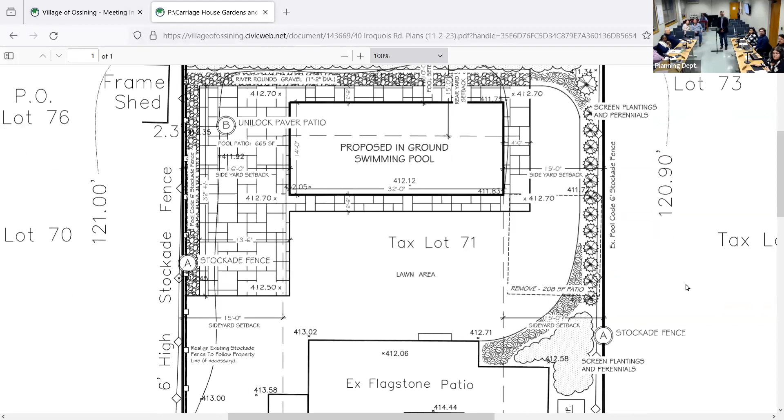Are you talking about the left side of that plan, on the corner of the existing flagstone patio? It says 413.02. Yeah, that transition, there's a transition there, and then the Bilco doors is at 413.58. It's kind of like micro grading, which is why it didn't register to me in terms of the topography - I was thinking of big grade changes. It's a smaller grade change, but shifting the pool gives a little bit more wiggle room to slope. The water's got to pitch away from the pool, and it's also got to pitch away from the patio, so we do have to create a swale for the water to move around the pool. I believe that's what they were alluding to.

So where it says stockade fence there with the A symbol - yes, that patio would actually move forward towards the existing flagstone patio if the pool was to move forward, along with the rest of the pool patio. So they would almost be touching them.

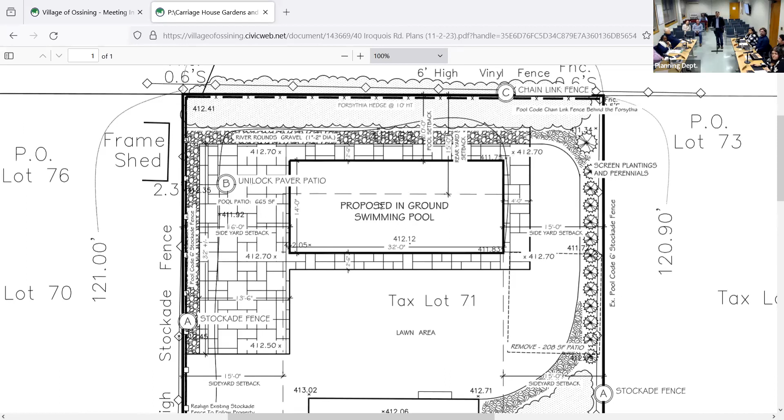Correct. Is the patio they're doing around the pool pervious or impervious? That's what I was gonna ask. It's gonna be Unilock, with open joints on stone dust. Well, I mean, that would help in the drainage, right, because the water's gonna- yeah, we still have to pitch it away from the pool, but it's a very small pitch, not even a foot of pitch over that distance.

But it's only 20 feet of distance, not a 200-foot run, it's a 20-foot run. So it's just a small grading thing, but when you're out there in the space, it needs to be addressed. Shifting the pool back, even those 5 feet, makes a big difference in terms of the slope of the lawn and how to deal with the water that moves around.

Does the gutter from the existing structure discharge near that flagstone patio? I think the drainage goes around. The gutter goes right here by the Bilco doors. Yeah. I'm not sure. And there's like a hill.

Are there any other questions from the board? If there's no other questions from the board, thank you.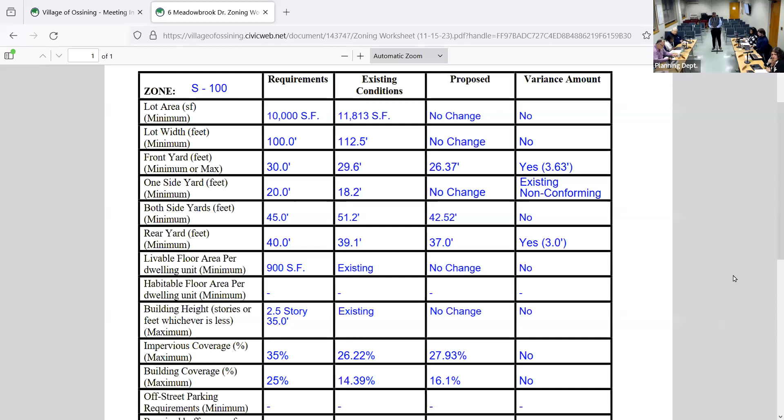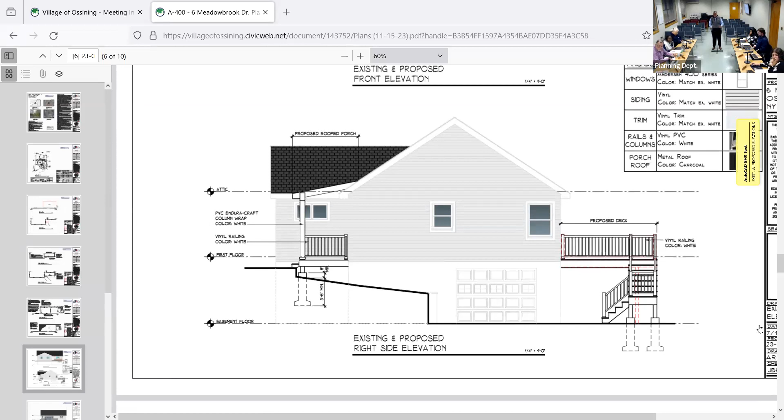That's the front porch, yeah, that's the rear. If I'm correct, just to see the layout or survey of it, it's not the entire deck. Right, that's what I was saying, that we're reconstructing the deck, only the first corner area.

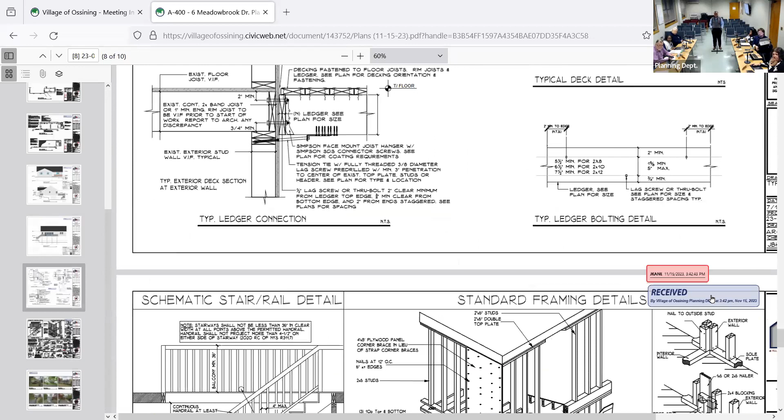So this matches the existing deck. Well, the whole deck is not within the setback, it's a corner. So they're lengthening it, which they don't need a variance for, I think, except for it's on the second sheet. And this is hard to see, but it's that tiny little corner.

Right there, you go, that's the land. So you only see that 3-foot corner. Right, a 3-foot variance, but only on that one tiny corner. As you can see, the setback parking line touches the stairs.

And actually it's mostly the stairs, because of the shape of the lot. And there's stairs underneath, so it'll be harder to move that instead of the stairs.

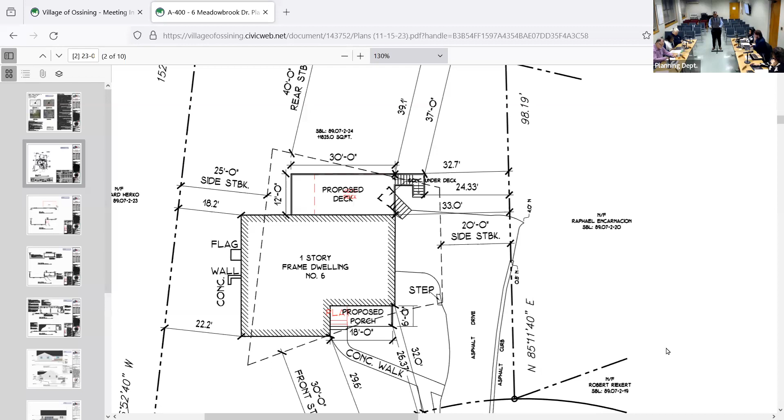Any more questions? Okay, if there are no questions from the board.

May I have a motion to open a public hearing? So moved. Second, Bob. If by unanimous consent, if there's no objection, the public hearing is now open.

Is there anyone on Zoom, because there's nobody in the audience, that is here to discuss this property? If there is none, may I have a motion to close the public hearing?

So moved, Bob. Second, Kyle. Is it adjourn or close? No, it's gonna have to be closed because the other one is a new application for the front yard. Well, it's not a new application.

It's not a new development, it wasn't, it's within the application, it just wasn't noticed. So the referral letter has the front yard variance and so does the applicant's materials. It wasn't published in the notice, so we're gonna have to renotice it, but it doesn't have to be approved.

Okay, so are we adjourning the public hearing? You can adjourn the public hearing and vote on the rear yard setback variance. So, I have a motion to adjourn the public hearing? Got you. To adjourn, Bob. Seconded, Kyle.

All right, so let us go through the factors for just the rear yard. All right, so the first factor is whether the variance would cause an undesirable change in the character of the neighborhood or be a detriment to nearby properties.

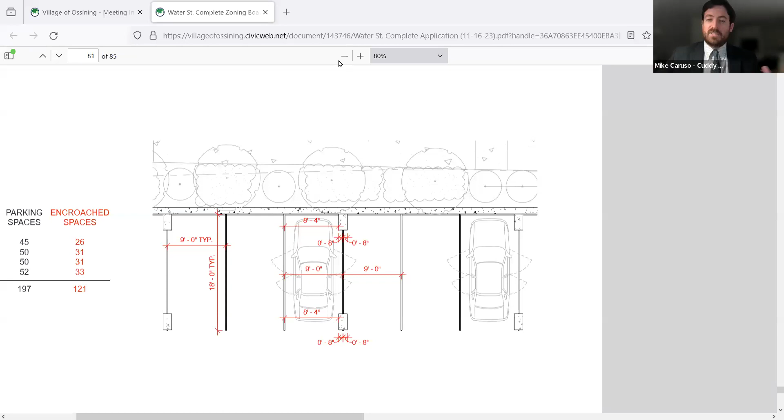As you can see in the middle space, those cast-in-place members, which appear near the front of the vehicle and near the rear of the vehicle, are not going to affect vehicles getting in or passengers getting in and out of the cars themselves. So again, no change to the width of the parking aisles, no change to the depth of the parking spaces.

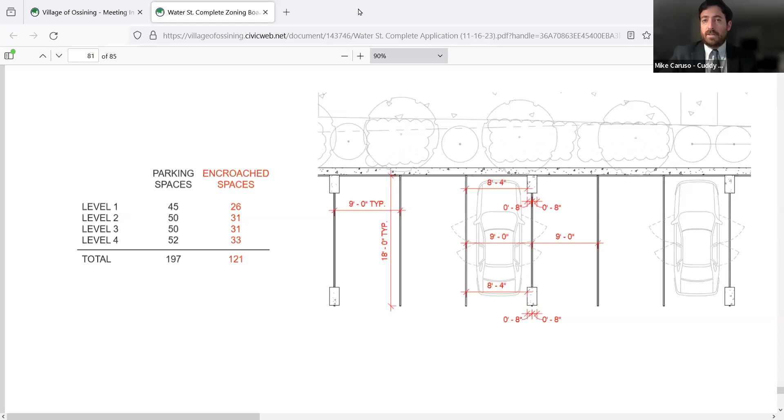The second variance we're seeking is with respect to the grade, a slight increase to get to the 4th level of the parking structure. In this case, going from a 6% grade to a 10% grade, and we can't exceed 6% within 25 feet of the street, which is why we need the variance.

Once again, this will not change the outer envelope of the structure. It won't change the dimensions, the footprint, or any of the studied environmental impacts that have already gone through SEQR. So really, these are de minimis changes.

And we discussed these at length in the November 16th submission. If the board wants me to take you through the 5 factors, I'm happy to do that. But at this time, the proposed action is still consistent with the environmental review for the entirety of the project and the previously adopted negative declaration.

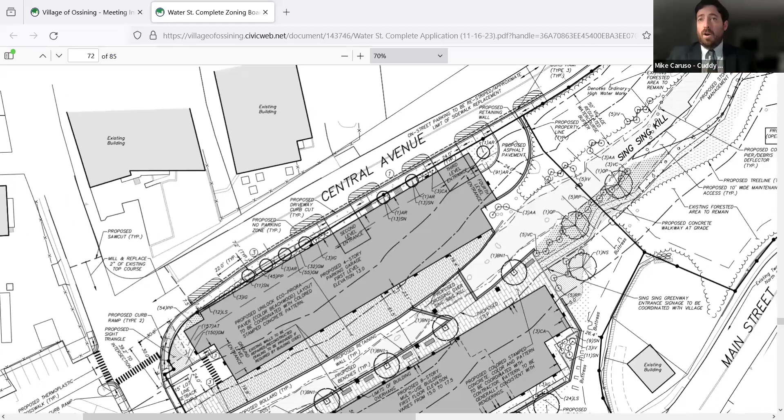So our request tonight, respectfully, would be that the board open and close the public hearing and vote on the variances. If you have any questions, I'm happy to field any, along with Jim.

Can you tell the board which driveway we're talking about, is that the one going off of Central Avenue to the parking structure that has the grade issue? It's the entrance to the fourth level of the parking garage on Central Avenue. This is Mike Spall.

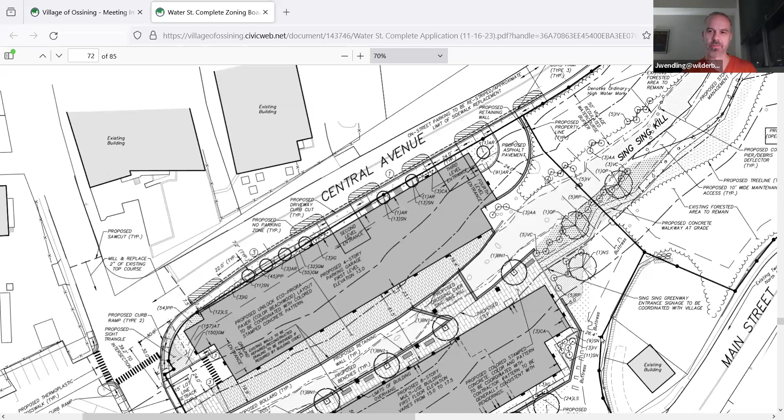With these reduced parking space widths, would that restrict any kind of vehicles from using those particular spots, or do they have to be noticed or signed to make sure you don't have panel trucks or something trying to use those spaces? No, it would not restrict certain cars or trucks from parking, no more than a 9-foot parking width would restrict certain vehicles from parking in such a space. It would not change that element.

The second question I have is, the 6 to 10% grade change, would that restrict any vehicles trying to make that corner up to the final floor? No, we confirmed that with our civil engineer. It would not. Would not, okay. Yeah. Gotcha.

How many parking spaces does this affect out of the total? It's 121 parking spaces out of 197. Wow. That's right, 121 are affected of the total of 197.

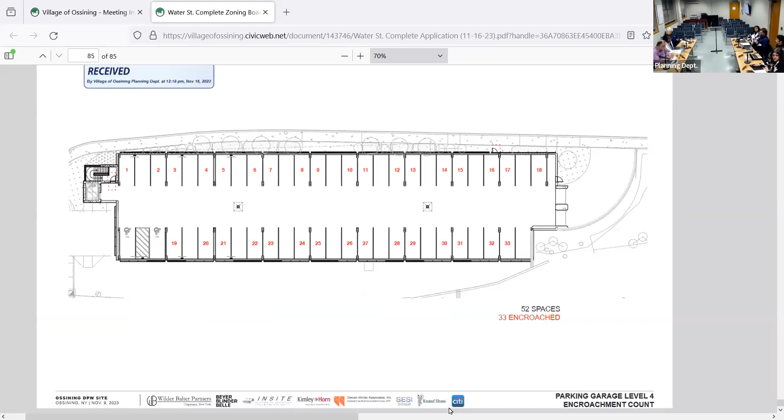And what does our code say with regard to width? You have to have a minimum 9-foot width. So it's 9-foot width the whole thing, except for that bottom corner. Right, correct. So the doors will still be able to open, it won't affect the functionality of the space practically speaking, just a very small portion. The middle space best depicts the issue we're here to discuss.

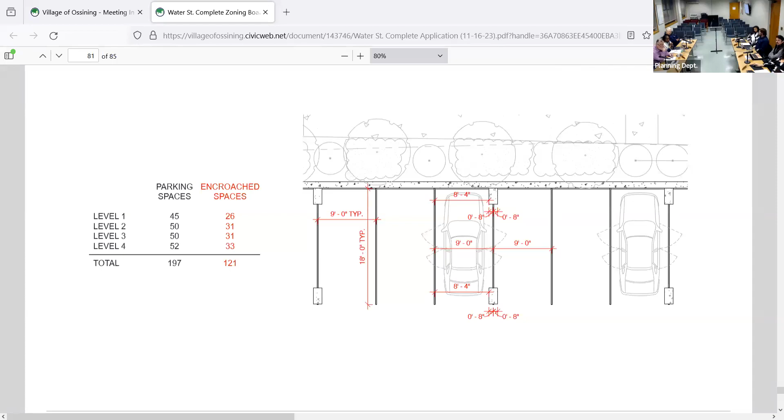Are there any other questions from the board? If not, may I entertain a motion to open the public hearing? So moved, Bob. Second, Kyle. If there's no objection, the public hearing is now open. Is there anyone on Zoom to speak on this? There is not. May I have a motion to close the public hearing? So moved, Bob. Seconded, Olga. If there's no objection, the public hearing is now closed.

So with that being said, do you want to do them separately? That's up to the board. We can consider them together as long as you articulate in your analysis one for each factor. I think we're open to just going down the factors and running through this. Let's do it.

The first factor the board must consider is whether granting the requested area variances would produce an undesirable change in the character of the neighborhood or cause a detriment to nearby properties. No, and we have to give a reason. The reason is the grade change was approved by their civil engineer. That satisfies that for me, and it's only for the top of the garage for public parking and the columns in the spaces. It's very minor impact, only at the front and rear of the vehicles, so functionally it doesn't change anything in terms of the neighborhood character.